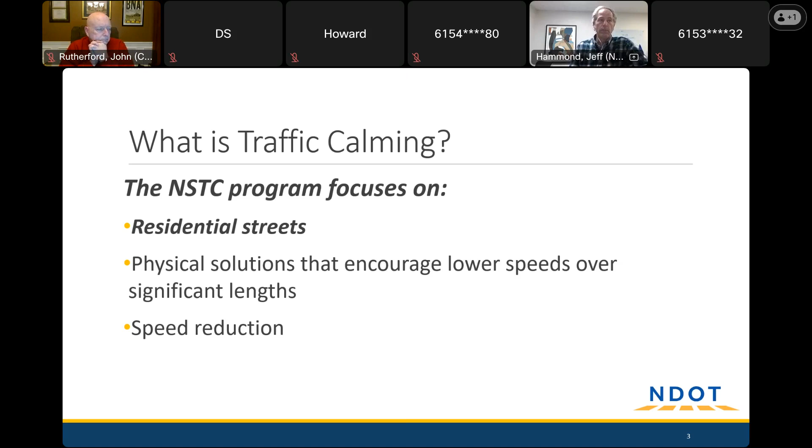Lastly, we focus on physical solutions. In the past, we've focused probably more on pavement markings and signage to try to convey a message, but we've found that nothing is as effective as putting something physical in the street that you might have to drive over or around. That brings about the greatest reduction in speed. Not to say there aren't other tools, we'll talk about some of those, but that's what we do in this program.

We know we're not the only game in town. We have great partners in both education and enforcement, particularly MNPD. A lot of people in these meetings say, 'Can't we just park a cruiser and write some tickets? Wouldn't that help?' And I'd agree, I think it would, at least for the short term. But our police officers are out there doing very important work, and traffic enforcement isn't always at the top of their priority list. So NDOT steps in as manager of our public rights of way and says there's an engineering solution to some of this, or at least an engineering aid.

And so that's what this program seeks to do. But we do correspond with police and the fire department, especially our emergency responders, just to make sure what we're doing is in concert with the bigger service scheme for Davidson County.

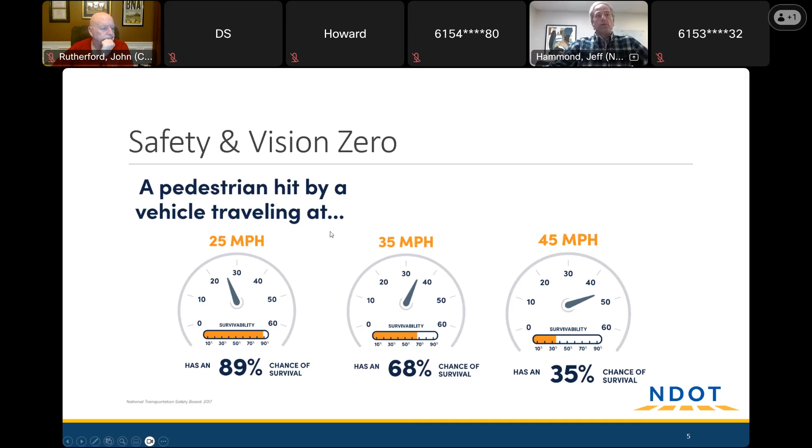I mentioned safety. One reason we do this program, and why I think it has gotten very popular, is because of the evident safety implications. We know streets aren't just for driving. You're fortunate to have sidewalks on at least one side of this street, but a lot of our neighborhoods in Nashville don't have that, so this becomes an important statistic for them. In the unfortunate instance of a pedestrian versus vehicle crash, if that vehicle is going slow, you have a much higher probability of walking away from that crash as a pedestrian. That probably stands to reason, but statistics like this are a good reminder of the implications of people driving too fast, and we like to remind people of that.

I feel like I'm preaching to the choir a little bit. If you took the time to be here tonight to learn about traffic calming and are interested in this, hopefully you're not part of that, part of the issue.

But we do have these issues all over Davidson County. I've mentioned that it's a popular program, and this really gets to how popular it is. In this latest cohort that Barnes Cove is a part of, we have over 700 requests for traffic calming on individual streets just like this one.

You're not alone. You're not seeing things that aren't being experienced in every corner of our county. It's really too bad, but yours has gotten to a level that supersedes a lot of these other requests. So just to put that in context, we're able to do about 50 projects a year. We do those in two different cohorts, and this is the second one of the year. So you're going through this process along with 25 other neighborhoods at the same time.

We like to pause right here and mention one other opportunity or avenue you have for similar type aid or service requests from Metro. We're going to talk about specific tools we have in our toolbox with this program, but a lot of times people may say, what we really need is a sidewalk, or what we really need is another all-way stop. Those are fine requests and they certainly have their place, it's just not something we do with this program. Where you would make those requests is at hub.Nashville.gov.

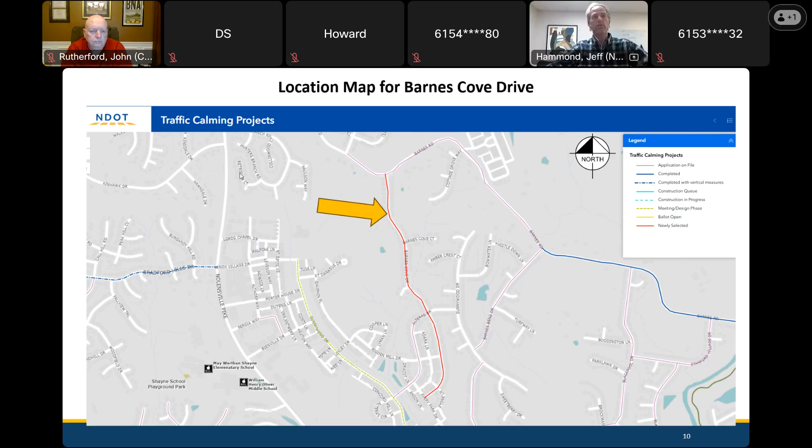And then the last color I think is important is the purple one. Those are streets that have applied for traffic calming but have not yet been selected. So you may be curious about other streets in your area—has anyone ever put in an application? You can come to this map and see that information. We're not actively working on anything on those streets, but we do have an application on file.

All right, I'm going to go through some of the more common tools that we have in this toolbox, things that we can deploy on these streets. The first one has really become the bread and butter of this program. Probably most people think of us as the speed cushion program, and for good reason—we use a lot of them. They have really become the go-to tool for most of our streets.

Number one, we like it because it's consistent. These are manufactured devices. You may have encountered speed cushions or speed humps made out of asphalt or concrete—those are fine too—but what we do like about these is everyone's the same. So they drive the same, they feel the same from neighborhood to neighborhood. They're very recognizable.

Sometimes they're 2 wide, sometimes they're 3. We've gone up to probably 5 wide or so. All of that just depends on how wide the street is. And so that's where that 30-foot wide dimension for Barnes Cove Drive comes in, that we just need to make sure that we're covering the width of the road and not leaving enough of a space that someone can just drive around these, because they will.

In your case, you've got a curb on either edge of the road, so that's going to prevent somebody from leaving the road. But we've had people actually drive off the side of the road in order to avoid them. If we let them do that, that kind of obviously voids the purpose of it. And so you only get the speed reduction if people drive over these.

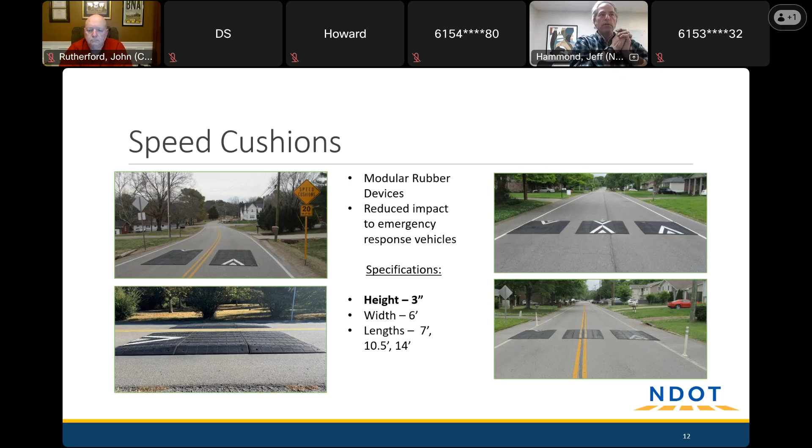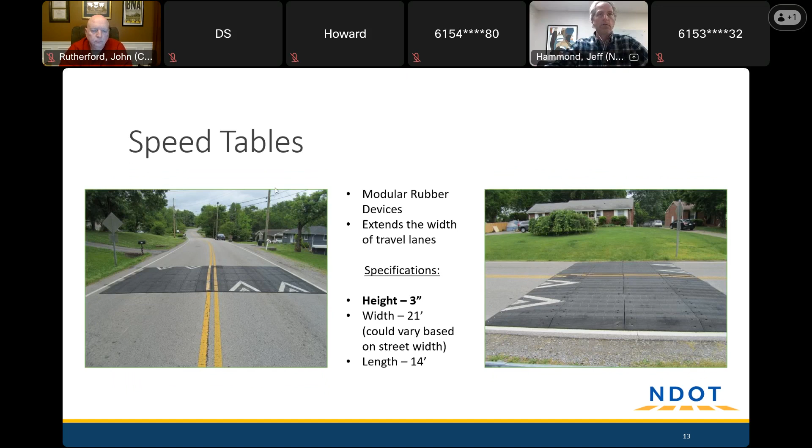Move on to the next one here, which is a pretty close cousin to the speed cushion, is the speed table. It's made by the same company, same recycled rubber material. Just the obvious difference is it doesn't have those gaps in it. For that reason, we don't use these as often. Sometimes there's a specialized consideration that we might use a speed table, but we really try to stay with the cushions as much as possible.

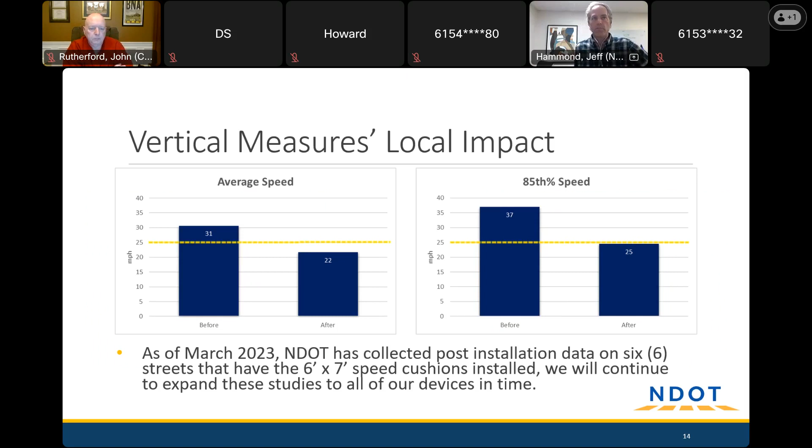Another tool that we do have in our toolbox is the feedback sign. This kind of gets to that educational component that we mentioned earlier. Basically does what it says, and you guys have probably seen these as well. We will deploy a feedback sign a lot of times when we can't put in something like a speed cushion, that might be a steep hill. That might be we have driveways that are too closely spaced and we don't want to block somebody's driveway with a speed cushion. There's a number of reasons.

Maybe the traffic volume is too high. And so we will opt for something like this that may not quite be so impactful to a lot of traffic on the street. It just gives you the speed that you're going in. And a lot of times just getting that feedback to a driver, you may not realize you're coming down a hill and you're going as fast as you are, and sometimes that sign can be a big help.

The before and after data here is probably a little bit more susceptible to familiarity. The longer that sign stays out and the more you drive by it every day, it may kind of blend into the background, but a lot of people in our neighborhoods say no, it absolutely does its job, and it does a great job, and they're very happy to have them.

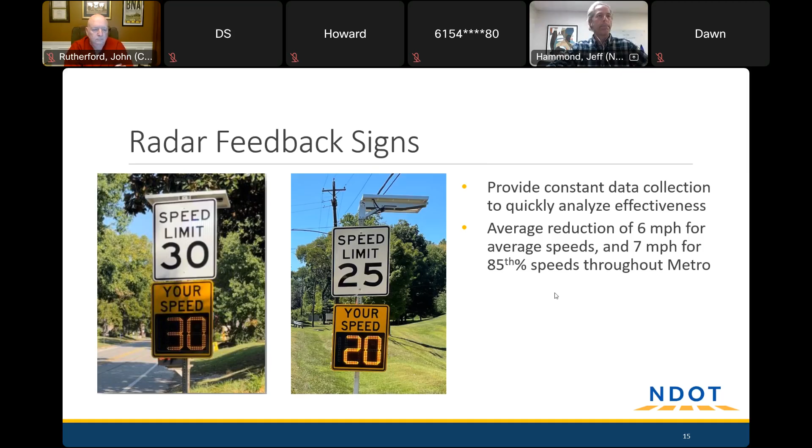So pavement markings can be a tool for us. As I mentioned, sometimes the wider the street, the more comfortable it is to go faster. So sometimes we can put pavement markings out there to narrow the street and make it feel a little tighter, like you might have in more of an urban area.

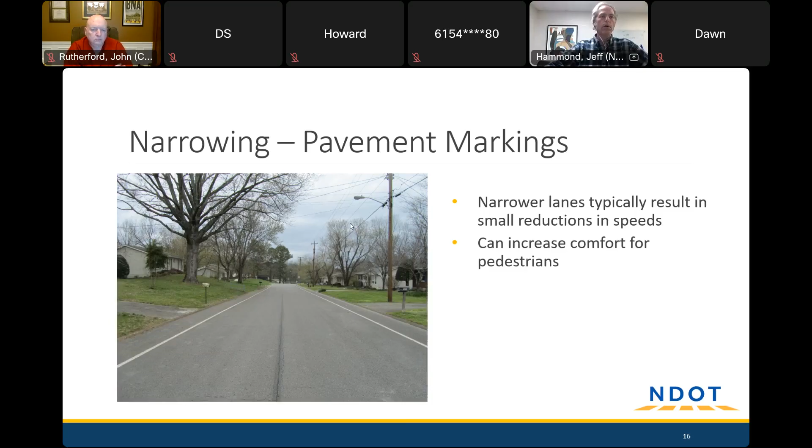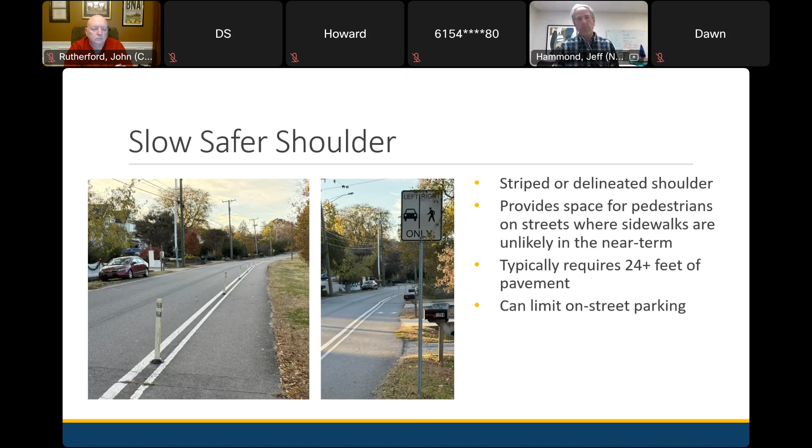There are some specialized uses of that, like the safer shoulder. In a very wide street, maybe we want to carve out some of that pavement width and not only narrow the street, but give people a place to walk. That's a good option, especially if you don't have sidewalks in your neighborhood.

We can also do specialized things at intersections, particularly very large sweeping intersections. You guys are probably familiar with some of those that have gone in on Bradford Hills. We get a lot of feedback on those, so we're aware of that. That's not a good fit for every street, but it can have a good impact. Again, if you've got really high speeds turning onto or off of a street, sometimes we'll look at doing that, particularly in more urban areas where you have more sidewalk, more pedestrian activity—it can be helpful.

There's also different ways to handle it. I know in that case I mentioned, there are some delineators that are out there. We can do different things like in the upper right-hand picture you see, and actually like an old school speed bump like you might see at the Kroger or Home Depot. You don't want to run over those at a high speed either, and they're a little more low profile, and sometimes people think they fit into the neighborhood better.

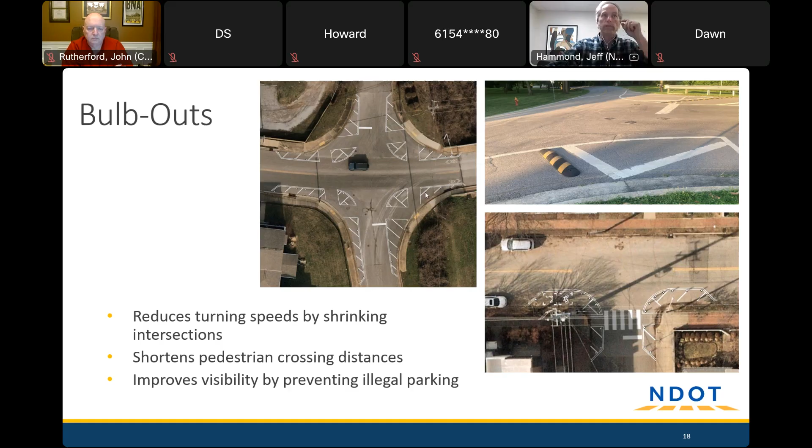So we do have some different options on bulb-outs. Chicanes are a very specialized one. There's only 2 or 3 streets in all of Davidson County that have these. It can be effective in an urban area where you already have some on-street parking. It creates an artificial meandering, but we don't have a lot of before and after data on these, and we don't do very many of them either.

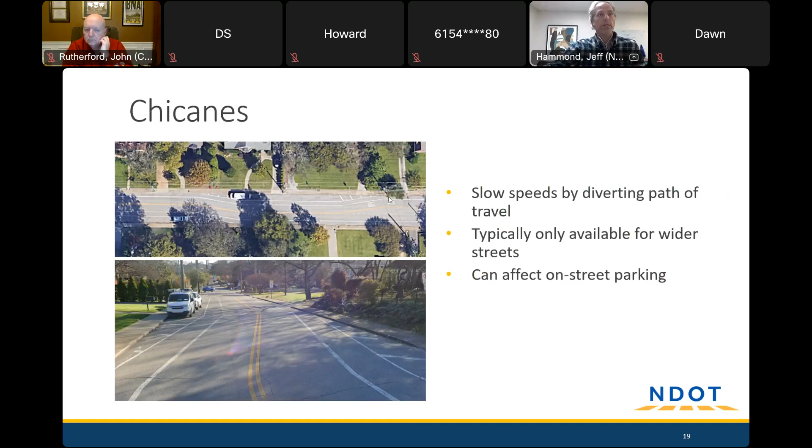One that's new that we're kind of looking for just the right street—because I think it takes just the right street for this to be a good and safe improvement—is a pinch point, where cars literally cannot pass. They have to yield to each other as they wind their way through this. Again, there's 1 or 2 of these in Davidson County, so we don't use them often, but on a very low volume street—probably not yours, 2,200 cars is probably more than we're looking for on something like this—it can be effective.

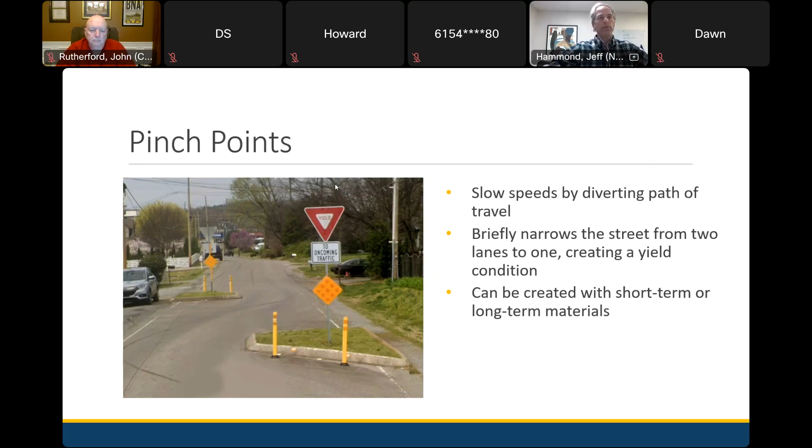And then the last one, traffic circle, particularly when we're trying to calm two streets that intersect. You have to have a lot of pavement—it takes a very large area to accommodate something like this. Even still, we have had a lot of impacts when we've done these, with school buses and other large vehicles having trouble navigating them. But that's kind of the point—you make it sort of hard, and you have to slow down in order to turn around these things.

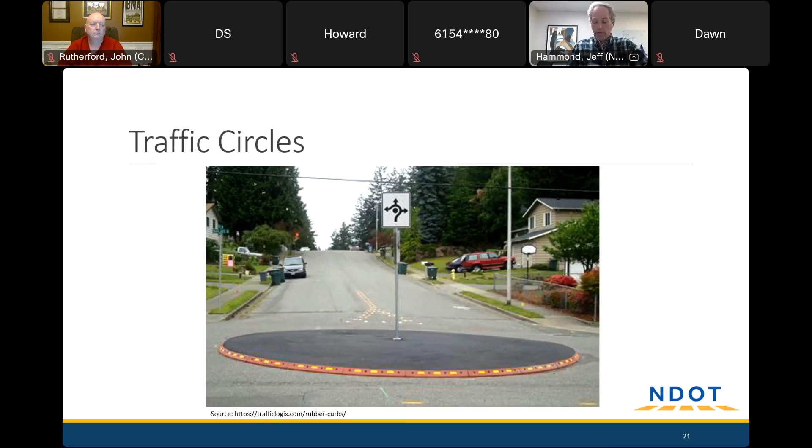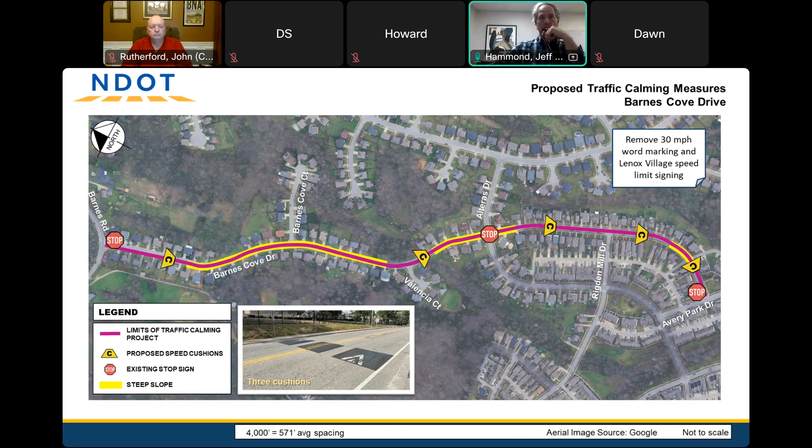All right, I'm going to move on, but I'll be glad to come back to this slide and talk about it if you have other aspects or questions, feel free. But let me move on to where we are now and where we're going tonight.

In any event, we will formulate that into a formal design plan package. They're not very technical - I think most people can pick it up and see what we're doing, but we'll give more detail. We'll actually come out, make field measurements, and tell you on the design plans exactly where we're proposing these. It'll say something like, we want to put a set of speed cushions 62 feet from the driveway at 123 Barnes Cove Drive, something like that. So you will know exactly where they're being proposed. We will publish those design plans online.

At that point, we can have a decision to make as a group. We can come back to you, we can talk through this. If you want to know more about what's happening at the intersection or any aspect of this, if there's a disagreement on what we ought to do, we're happy to come back and do the second neighborhood meeting.

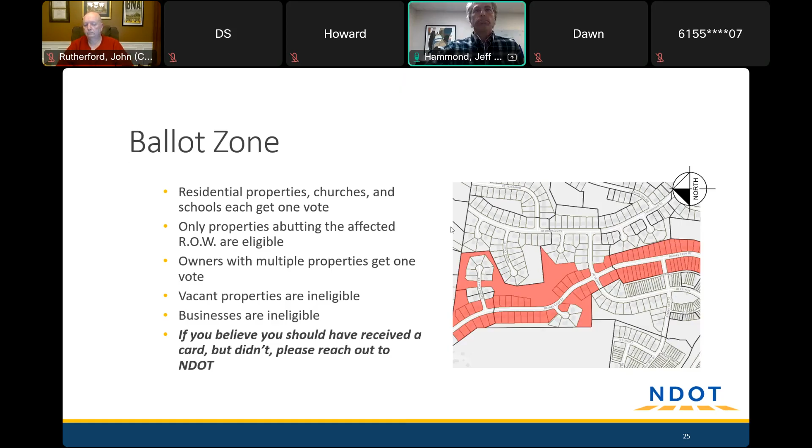Okay, that pretty well wraps it up. That's the information that we've got. Feel free to get in touch with us if you think of other questions or have concerns or anything else.

Anything final before we wrap up tonight? Sorry, went a little bit longer, a little over an hour, but good discussion. It was worth it, hope you think so.